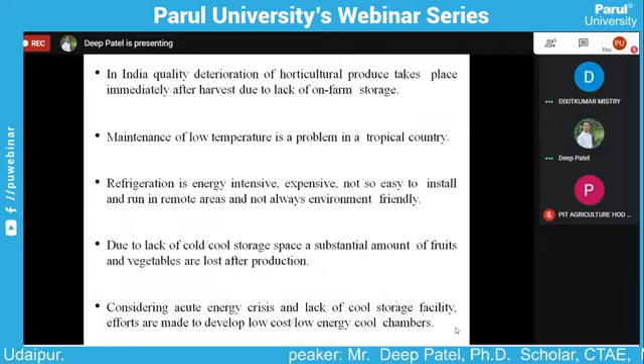Considering this acute energy crisis and lack of cool storage facility, efforts are made to develop a low-cost energy cool chamber. An Indian institute has developed a technology for zero energy cool chamber as a complete alternative for the refrigeration and cold storage system, and it is named the Pusa Zero Energy Cool Chamber. This is an on-farm storage which is used for fruits, vegetables and flowers to extend their shelf life.

The zero energy cool chamber can stay 10 to 15 degrees cooler than the outside temperature and maintain 90 percent relative humidity. For perishable horticulture produce, it is required to have lower temperature and higher relative humidity for reducing their deterioration and increasing their shelf life.

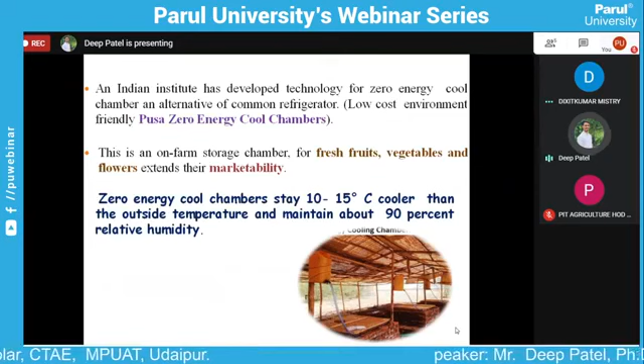Here is the photo of the zero energy cool chamber, which is developed from locally available material, and it is the perfect alternative for food cold storage and refrigeration systems. This structure works completely on the principle of evaporative cooling. It is operated naturally.

It is the gift of nature, and the cooling is done by evaporation. How does the cooling take place inside the chamber?

Evaporative cooling occurs when outside hot air passes through the cooling pad of this structure. The hot air loses its heat to the environment and consumes moisture from the cooling pad, then enters inside the chamber, where the cooling effect takes place.

Evaporative cooling is an efficient, economical means for reducing temperature and increasing relative humidity, which is perfect for the storage of perishables. The efficiency of this structure depends on the temperature and relative humidity of the surrounding environment.

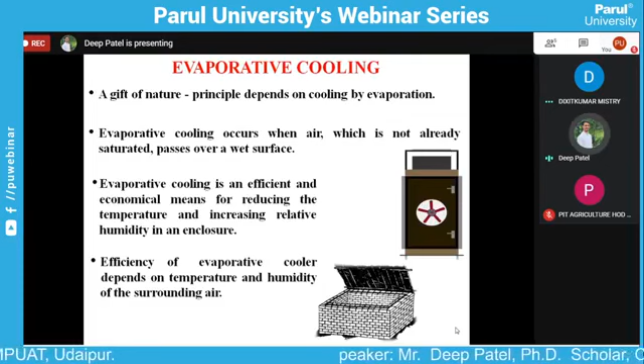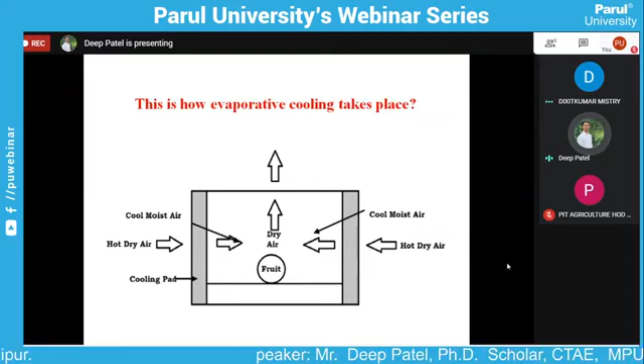Here is a graphical presentation of the evaporative cooling principle and how it takes place. There are two cooling pads, and when hot outside air passes through them, the water inside the cooling pad causes the hot air to lose its heat to the environment and consume the moisture from the cooling pad before entering inside the chamber.

Now, the concept of the zero energy cool chamber. Based on the principle of direct evaporative cooling, the zero energy cool chamber has been developed. The main advantage of this storage structure is that it doesn't require any electricity, battery, or anything else—that's why it is called a zero energy cool chamber.

It is completely operated by the natural circulation of air and water, the main fluids in this structure. The materials required for construction are also locally available, like bricks, sand, bamboo, etc. It is the construction; in the next slide we will see how it is constructed.

It is a double brick wall structure, and the cavity is filled with sand, and the walls of the chamber are soaked with water. Even unskilled labor can construct this structure; there is no requirement of specialized skill.

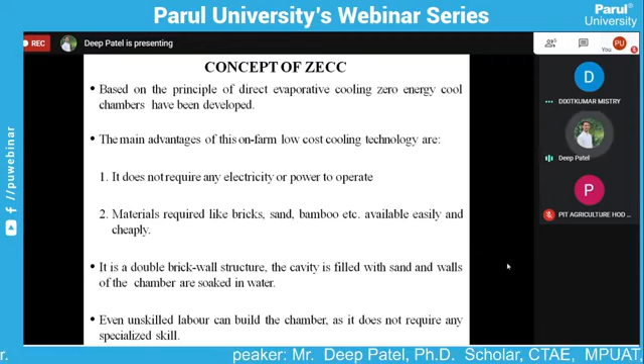The cool chamber can reduce temperature by 10 to 15 degrees Celsius and maintain 90 to 95 percent relative humidity, resulting in increased shelf life of produce and reduced deterioration of perishables.

Small and marginal farmers can store a few days' harvest to avoid the middleman. As the son of a farmer, I know that after harvesting we have to sell our produce immediately in the market—otherwise the middleman or businessman will pay less as the quality deteriorates.

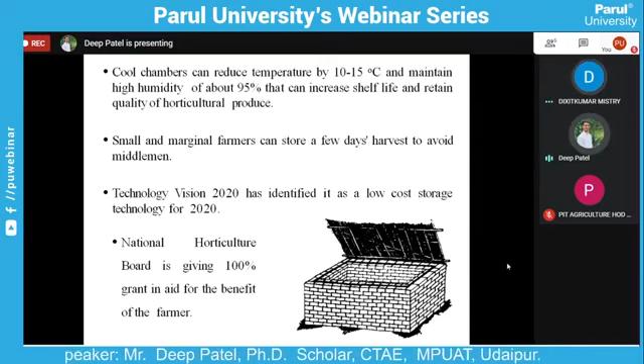The Technology Vision 2020 has identified it as a low-cost storage technology for 2020. The National Horticulture Board is giving 100% grant-in-aid for the benefit of farmers.

Now, how is this structure constructed? The zero energy cool chamber can be constructed easily with materials like bricks, sand, bamboo, khashkhas, gunny bags, etc. It is most effective during the dry season.

During summer season there will be high temperature outside, and it is very effective when the temperature difference increases. The greater the temperature difference achieved, the greater the cooling effect reported inside the chamber. The materials primarily used in constructing this chamber are bricks and sand, and fortunately both have a great capacity for holding water.

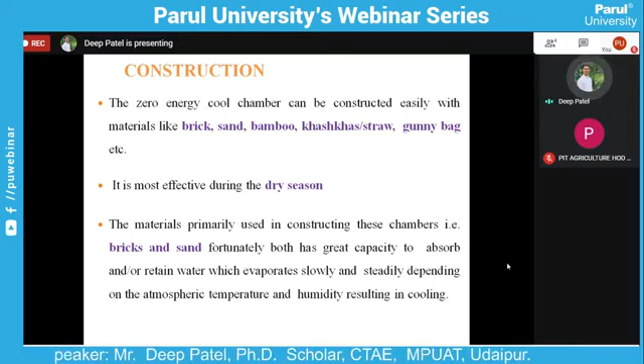First, before construction, we have to select a place to build this structure. The site should have natural airflow since it works on two fluids, air and water. It should be a shaded, well-ventilated place away from direct sunlight, because sunlight will reduce the temperature difference inside and outside. So we must make sure the structure is in a shaded place.

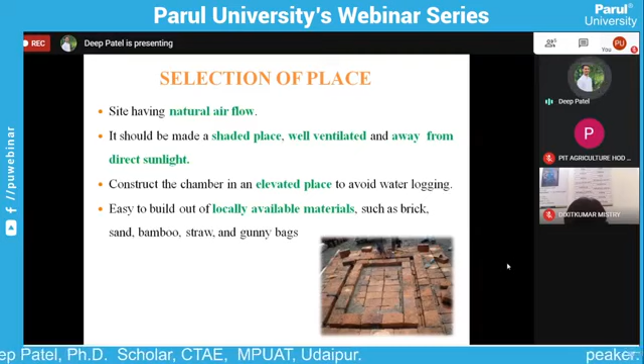Construct the chamber in an elevated place so we can avoid water logging during the monsoon season. It is easy to build using locally available materials like bricks, bamboo, straw, and gunny bags, which can be found nearby.

Now, the steps for construction of the zero energy cool chamber. First, select an upland area with a nearby water supply, since water is required for wetting the bricks and sand. We can construct this structure according to requirement—how much fruits and vegetables we have to store, 100 kg, 200 kg, or 300 kg. So as per our storage capacity, we can select the size and shape of the structure.

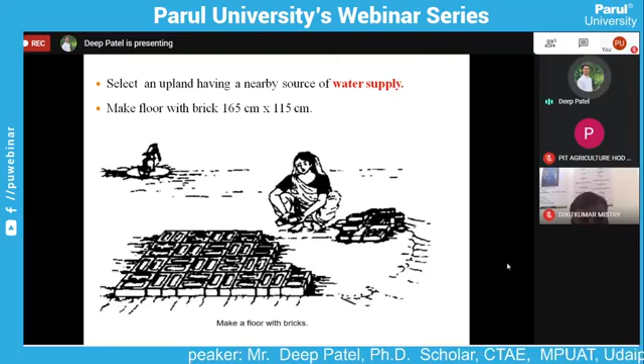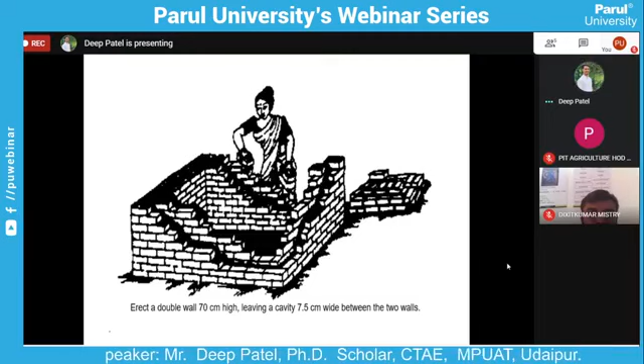As we can see in this image, two walls of bricks are constructed. In between the two walls, there is a gap for filling sand. The size, height, length, and breadth of the structure will depend upon the capacity of the storage structure. After constructing the wall on all four sides, the gap will be filled with riverbed sand.

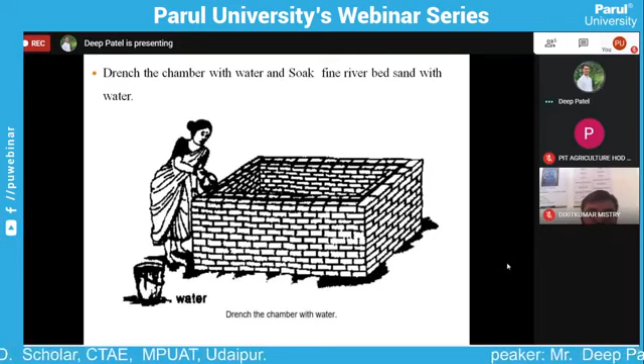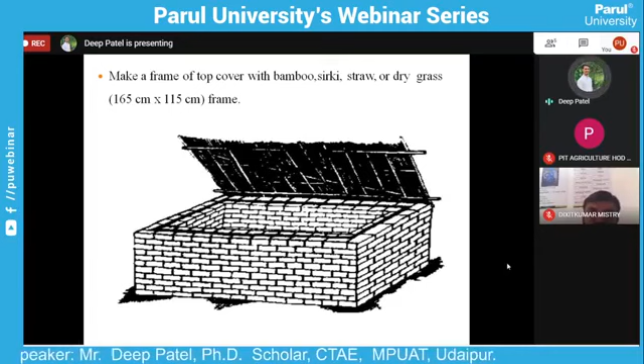Make a frame of a top cover with bamboo, sirki, straw, or other locally available material for closing the structure, so there will be no cooling loss during the operation.

The cavity between the walls is filled with sand, and the sand is kept saturated with water. The water tank will be placed beside the storage structure, and the drip pipe will be set on all four sides of the cavity of the structure, so we can wet the sand and the bricks.

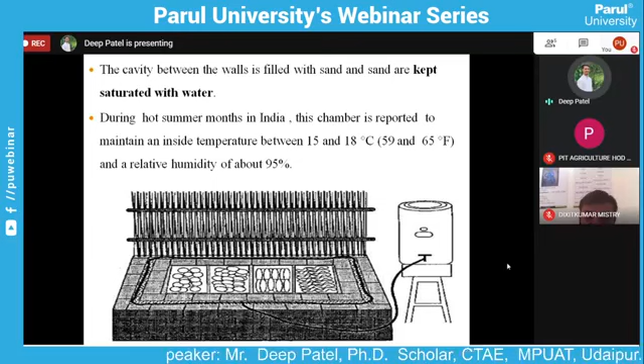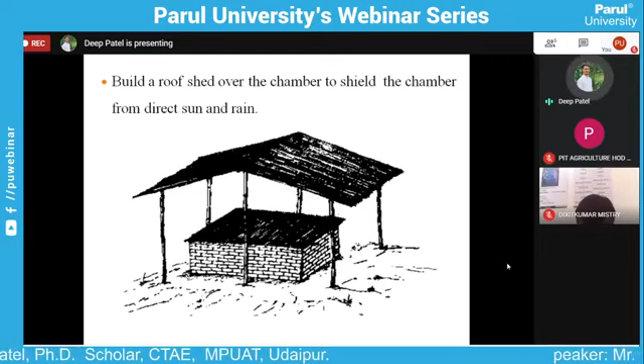During the hot summer months in India, this chamber is reported to maintain an inside temperature between 15 to 18 degrees Celsius and a relative humidity of about 95%. Build a roof shed over the chamber to shield it from direct sunlight and rain.

Now the requirements: make a shade over the chamber in order to protect it from direct sunlight or rain. As we discussed before, direct sunlight will reduce the cooling, that is, the outside and inside temperature difference.

Keep the sand, bricks, and the top cover of the chamber wet with water, so it will create the cooling effect inside the chamber. Water twice daily in order to achieve the desired temperature and relative humidity, or fix a drip system with plastic pipe and micro tubes connected to an overhead water source.

Store the fruits and vegetables in the chamber by keeping them in perforated plastic crates, so proper air circulation will take place and the quality of the perishables will be retained. Cover these crates with a thin polyethylene sheet.

The cool chamber should be reinstalled once every 3 years with new bricks, utilizing the old bricks for other purposes. In India, as per the report by the National Horticulture Board, 92% of cold storages are owned and operated by the private sector, and among them, 75% of the cold storage in India is used for one commodity only, and that is potato.

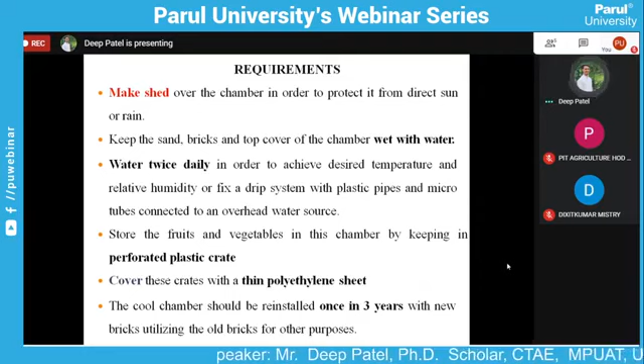So we require this kind of storage structure for fruits and vegetables, and it will be helpful for small scale farmers and vendors.

Regarding temperature and relative humidity, the cool chamber was found to maintain considerably lower temperature compared to field, shed, and room temperature storage respectively. We will see the comparison between open field, shaded, and room temperature storage of perishables. The fluctuation in maximum and minimum temperature was found to be highest in field conditions, moderate in shed, and minimum in a cool chamber.

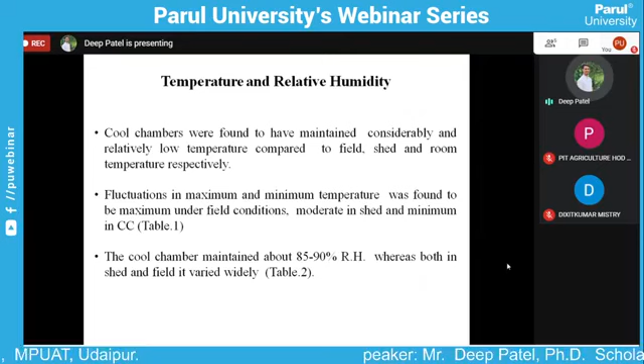Table 1 will show you the fluctuation in temperature. Here we can see the first column is given for a cool chamber, the second for the field, and the third for the shed storage structure. In January, the maximum temperature was 13, while the minimum was 10. Temperatures are given for the whole year.

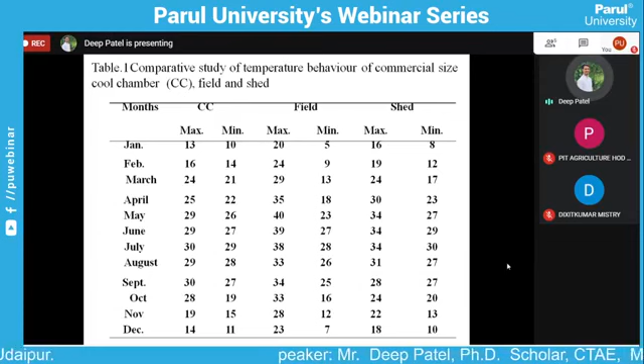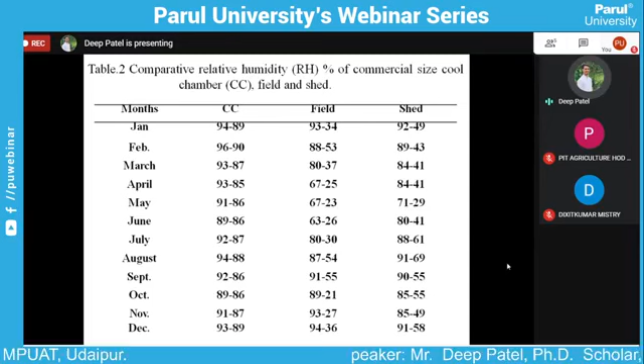Here is the comparative relative humidity of all three storage structures: cool chamber, field storage, and shed storage. The relative humidity was recorded, and we can see that the relative humidity and temperature are found suitable for fruits and vegetables in a cool chamber.

Here is the storage of fruit in a cool chamber. In the first column, the crops or fruits are given, along with the shelf life and physiological loss in weight in a cool chamber versus room temperature. For banana, we can store it for 20 days in a cool chamber, while at room temperature we can store it for only 14 days. For mango, we can store it for 9 days, while at room temperature only 6 days.

Even the physiological loss in weight can be compared: for banana, 2.5% physiological loss in weight is recorded after 20 days, while for room storage at ambient condition, 4.8% physiological loss in weight is recorded after 14 days. So we can say that the cool chamber is effective for storing fruits and vegetables.

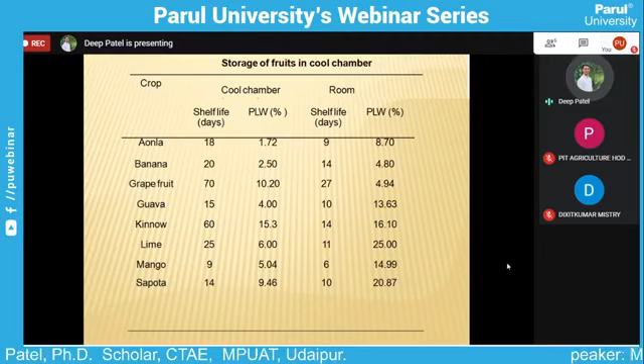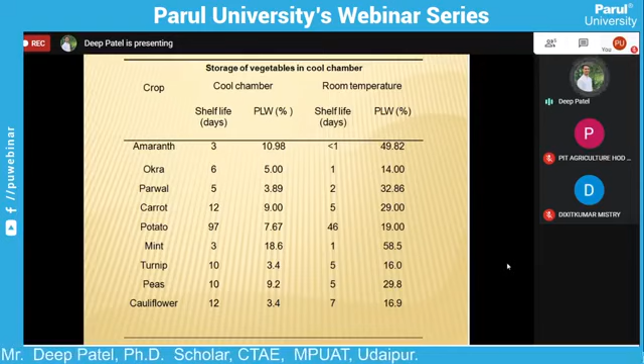For storage of vegetables in a cool chamber, for cauliflower, 12 days shelf life is recorded in a cool chamber, while at room temperature ambient condition, 7 days is recorded. Also, we can see that the physiological loss in weight is less in a cool chamber as compared to ambient condition.

Now, the cost of the cool chamber. The materials required for constructing this cool chamber are locally available, like brick, sand, bamboo, shade made out of a local tree or leaves, water tank, pipe, tube, plastic crate, and labor. For constructing the 100 kg capacity cooling chamber, it requires only 5,000 rupees.

And if we consider the cost economics, the net payback period will be maybe 1 month, 2 months, or 3 months. After that, you will get your profit.

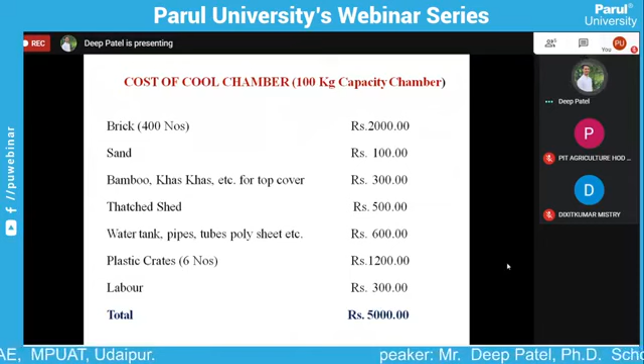Now the area of application: short-term storage of fresh fruits, vegetables and flowers. Growing white button mushroom, we can also grow button mushroom inside this structure. Ripening of tomato and banana, plant propagation, and storage of processed food products. It is not only used for fruits, vegetables or flowers; we can also use it for other food products which are reliable at this storage temperature.

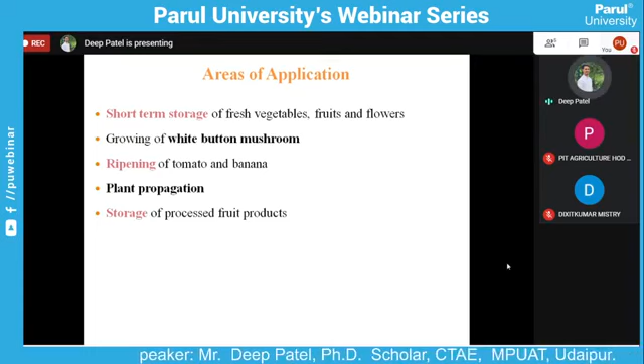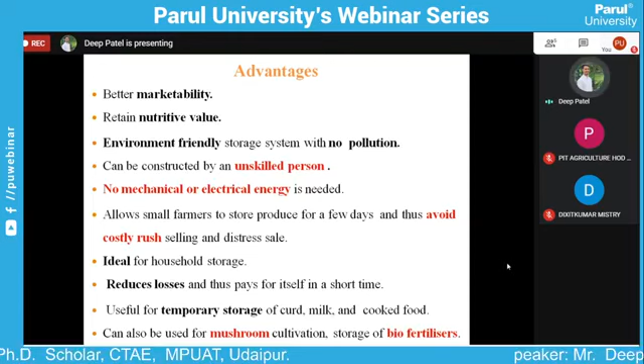Useful for temporary storage of curd, milk, and cooked foods. Can also be used for mushroom cultivation and biofertilizers.

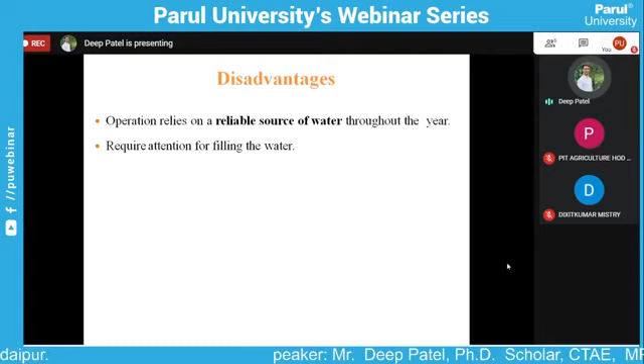There are some disadvantages of this structure, though we cannot really count these as disadvantages. It requires attention for filling the water twice or thrice a day. Operation relies on a reliable source of water throughout the year. As we discussed, air and water are the only fluids for operating this system, so we require a source of water near the storage structure for wetting the bricks and sand.